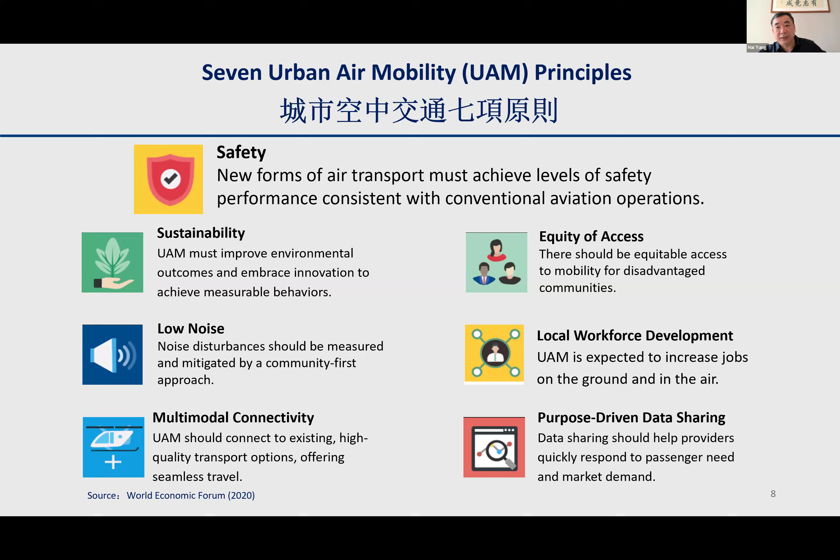We need multimodal connectivity. And finally, we also need purpose-driven data sharing to help service providers respond quickly to passenger needs and market demand. These principles should guide our planning of the low-altitude economy.

Of course, developing the LAE is not easy. There are many technical challenges. We need to build the right infrastructure and invest in such infrastructure, like vertiports and charging stations. We need a reliable positioning system for drones or eVTOLs.

We need advanced control and navigation systems. We also need sensing and communication technology. And we need a 3D GIS-based platform to manage the airspace. And we need to plan efficient routes and schedules for the flights. These are all areas where we need more research and development.

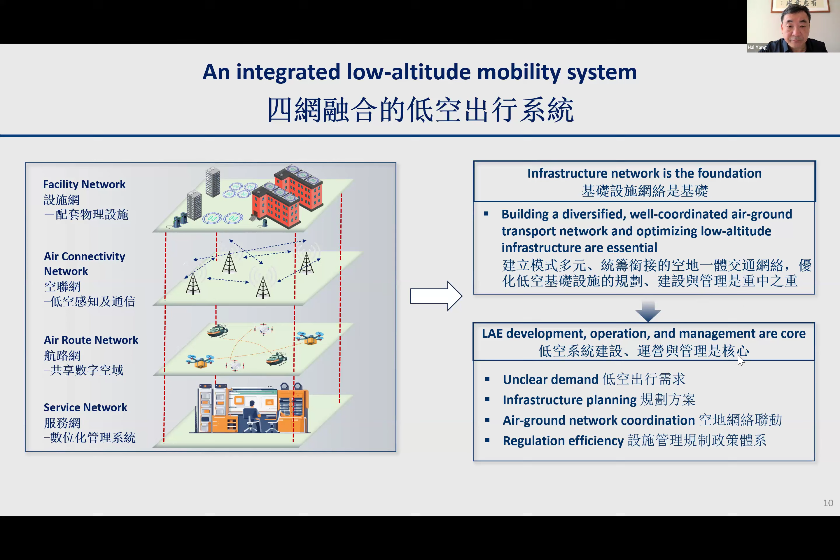Another example is to use drones to inspect the subway facilities. This is more efficient and safer than just sending people. So in our research, we optimized the location of the depot and the route for the drone.

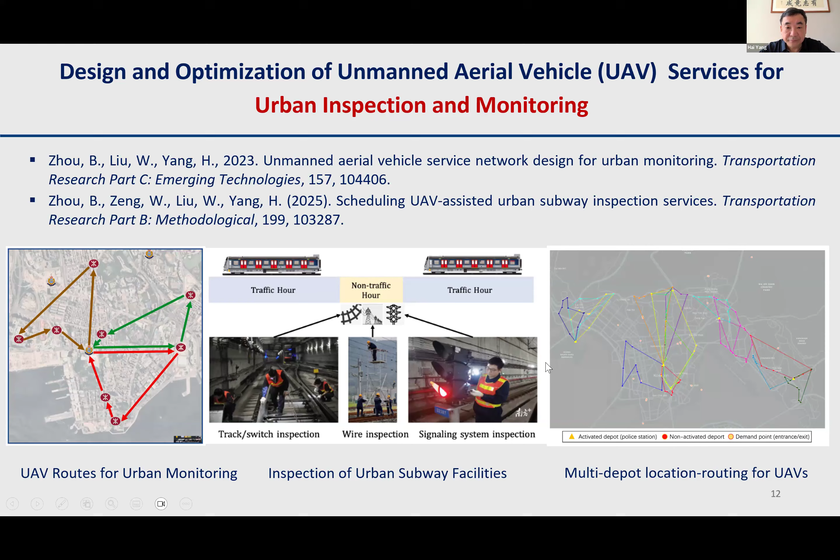Second, we have done some work on urban delivery. One key area is using trucks and drones together. For example, a truck can carry a number of drones. It acts as a mobile depot, and the drones can make shorter deliveries from the truck. This is efficient in some scenarios.

So we have also worked on designing delivery networks specifically for the drone depot hub and the delivery point. I won't go into the details. If you are interested in our research, you may refer to the papers which I already published.

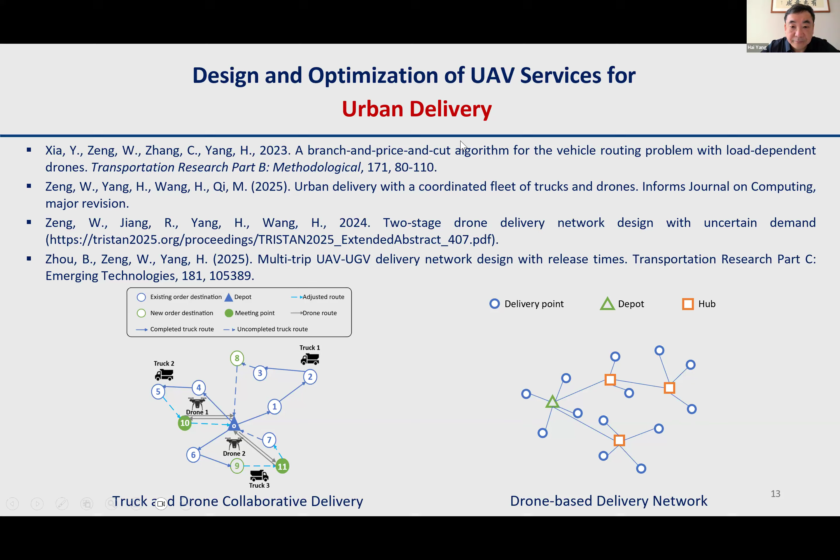Now let me explain one of our key research focuses in more detail. An important factor is that a drone's energy consumption depends on the weight, the payload it is carrying. So a heavy package uses more battery power. So we have developed an advanced model to account for this, the load-dependent drone energy.

We have also developed a powerful algorithm to find the best route and the best places to put the hubs. Our findings show that using an accurate energy model can improve efficiency, and placing hubs in the right location is important. And our algorithm can also solve large, real-world problems effectively.

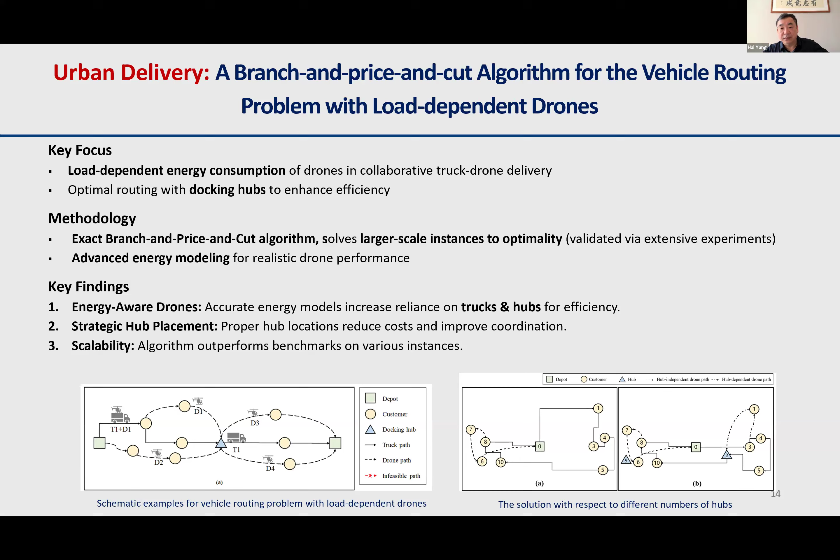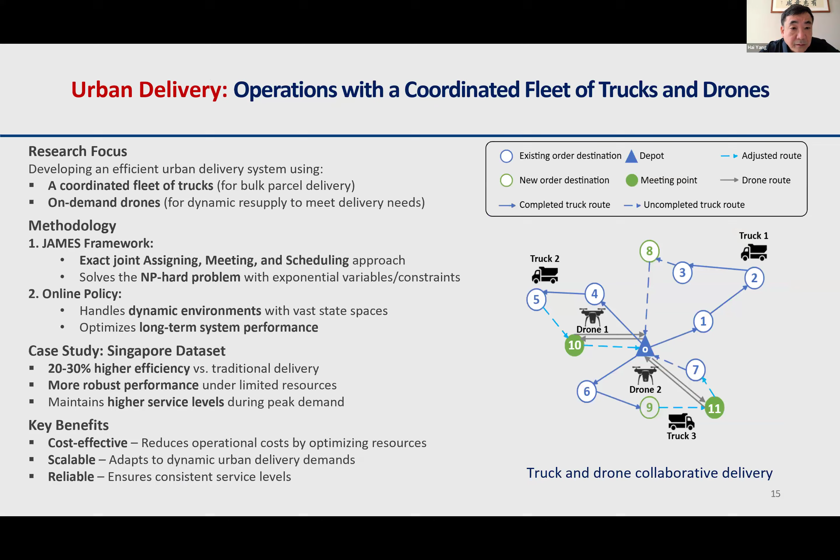We also designed a network for drone delivery that considers uncertainty, with uncertain demand. For example, the weather can change, making some airspace unavailable. Customer demand can also be unpredictable. So we developed a model to handle such uncertainties.

It is called distributionally robust optimization models. We tested this model with real urban data and demonstrated that it was more reliable than traditional models, and it can maintain service levels even during demand surges or bad weather.

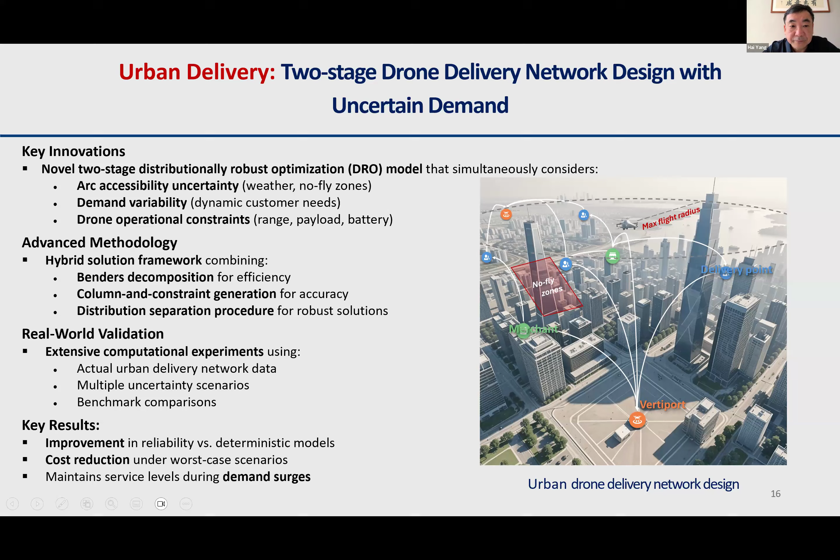In another project, we also looked at systems where drones and ground vehicles work together. The drones fly quickly, and the ground vehicles handle the final delivery. So we considered real-world constraints like delivery time windows and the ability for vehicles to make multiple trips.

Our model calculates the best hub location, the ideal number of drones and vehicles, the fleet size, and the most efficient route. The key benefits are lower cost, more reliable delivery, and better use of resources.

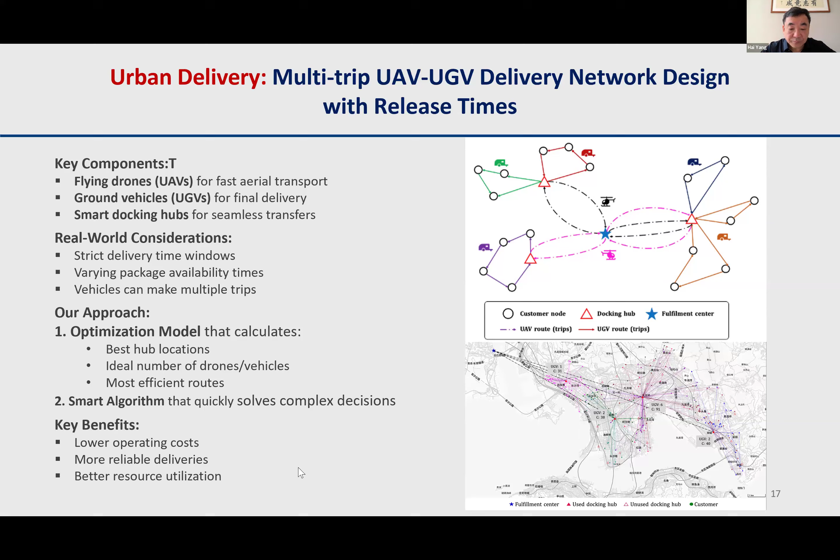So based on the framework and the roadmap, we have to deal with some key issues in LAE development. The first key question is, what is Hong Kong's position and strategy? As you may know, Hong Kong is strong in international standards and connections. We believe Hong Kong can serve as a global connector. This means three things.

Exporting Chinese mainland technology and standards of the low-altitude economy, and also becoming a demonstration zone for cross-border flight. We still have a border between Hong Kong and Shenzhen in mainland China. And also attracting international capital and talent to support the development of this industry.

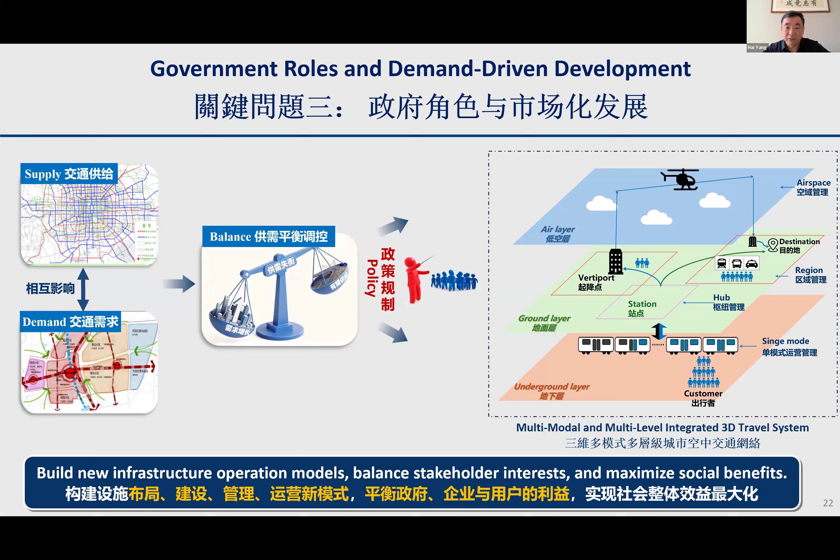The third key question is, what is the role of the government? The government should not just be a regulator. It should also be an enabler. The government should set up clear policy and regulations for infrastructure and operations. It needs to balance the interests of the government, the business companies, and the users. And of course, the goal is to maximize the overall social benefit.

So finally, I will tell you about our major policy research project and our main policy recommendations. We are very pleased to have received funding from the Hong Kong SAR government Strategic Public Policy Research Funding Scheme, or SPPRF. This is a 3-year project that already started in January last year, 2025, and will run until the end of next year. The project is titled Development Strategy for an Advanced Air Mobility Network in the Guangdong, Hong Kong, Macau Greater Bay Area. As I mentioned, this is a leading area of development in China. Of course, this is a very important project for us.